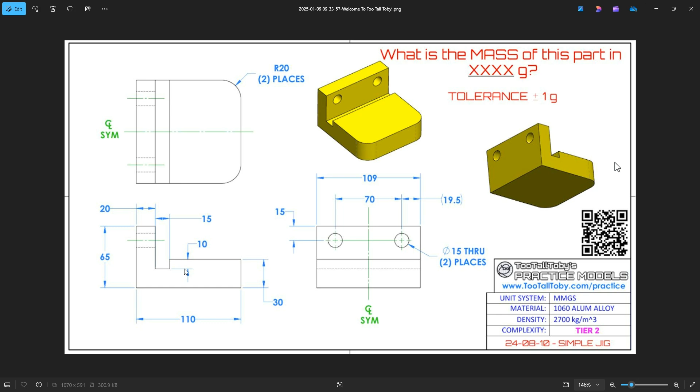everything. So basically the key things are we got 110 length, 109 width, 30 height on the base, and then we have our height here for the 65 from the bottom location, and then we have a little cutout here that's got a 15 millimeter size here, and a 10 depth from the top. So let's go ahead and do this model. Very simple. In IronCAD we'll build it really quickly, so this won't be a very long video.

So let's start off with an extrude here, and again we know we're in millimeters, so we're gonna go ahead and type in these values as we mentioned. The width of this is 109, and we're gonna set the length to 110, and we'll set that height value to 30. That will give us our starting points.

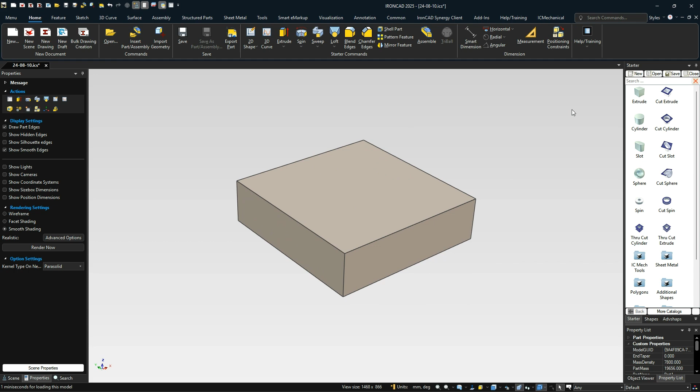Next, we can do a couple different ways of approaching this. We can drag and drop another block on here. We can pull this top face up and extrude and adjust it. Either way works, so I'll just start with another extrude feature, and I'm just going to drop on this point back here, and I'll simply align this back one by holding my shift key down and pulling that, and then right-clicking on our side handles here to do a symmetrical size, and shift to snap to that.

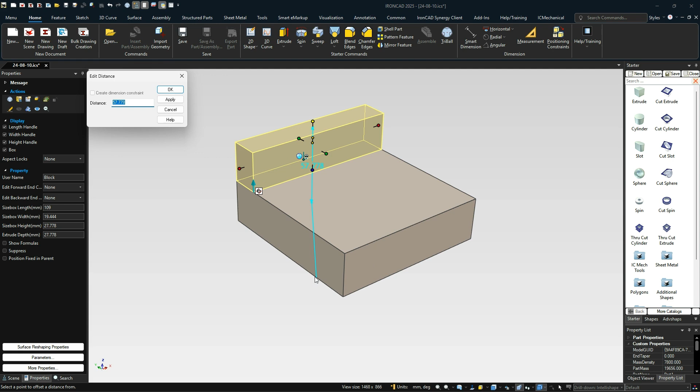Next, we can do the sizing, which is we know the distance from the bottom, so we can just right-click on the top handle at a distance from point. We pick our bottom edge, and that value, as I mentioned, was 65. And we know the thickness of this is 20 millimeters as well. So that will give us our overall shape for that.

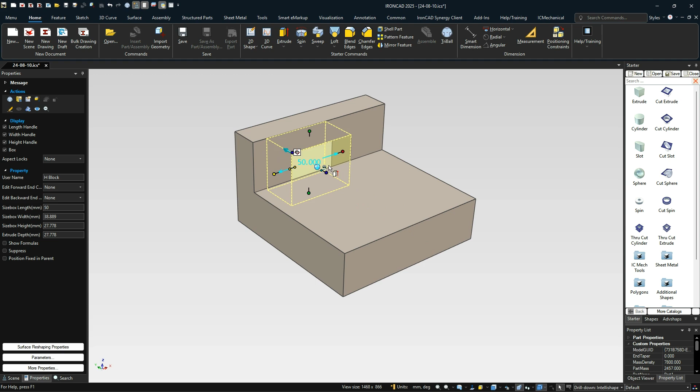Next, we'll do the cutout, and we'll do basically the same operations here. Notice when you drop onto the shape, it can give you a different orientation when you drop on an edge. So notice this one's extruding in this direction, and this is based on our view direction. So it currently sees that this is the main viewing direction. I'm going to delete that, and rotate down just a little bit. Now if I drop on that edge, notice it'll extrude in a different direction.

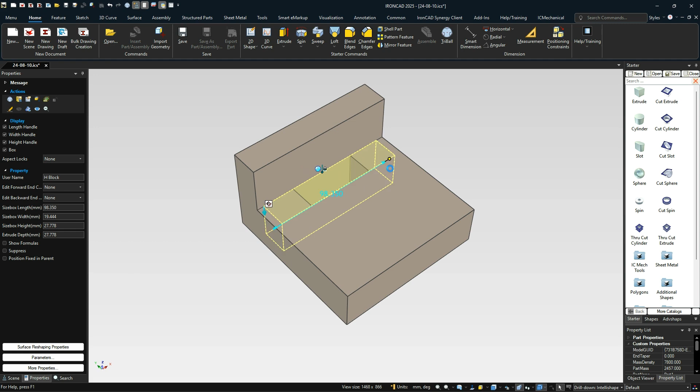So that's a nice little handy tip there if you're ever using IronCAD. That's how it drops when you drop on an edge. On a face it always does normal, but on an edge it has to determine which way to go. So in this case we dropped on an edge. I aligned the back handle to our face, and I'll do the same thing, our symmetrical here. Doesn't really matter, we can pull it all the way through.

But we can pull that there, and then we can set our depth on this guy, which we said was 10. And our thickness on this, since we're already aligned to the inside face, is 15 in that direction. So that gives us our cutout there. And the last thing we need to do is just add blends to this. So I'm just going to select down to our edge level. So we go Part, Feature, Edge. And then we can select both edges holding the Shift key down, right-click, Blend Edges.

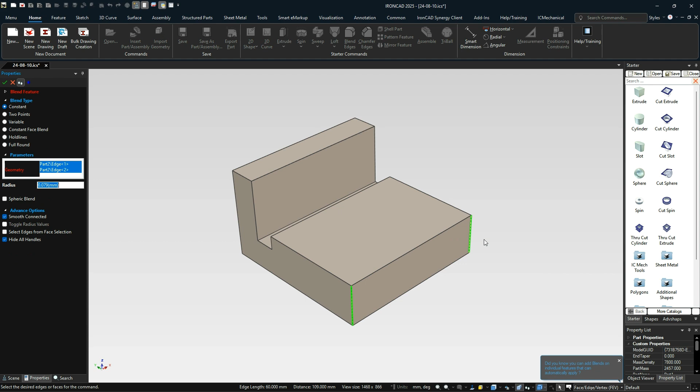In our case, this is set to 20, so let's type in 20 and hit Enter. That'll give you the preview. Hit Enter again, it'll apply the command. So that will give us the overall shape of our model. And the last thing we had to do is our holes. So one thing I'll do is drag and drop a hole right onto the center point of this face.

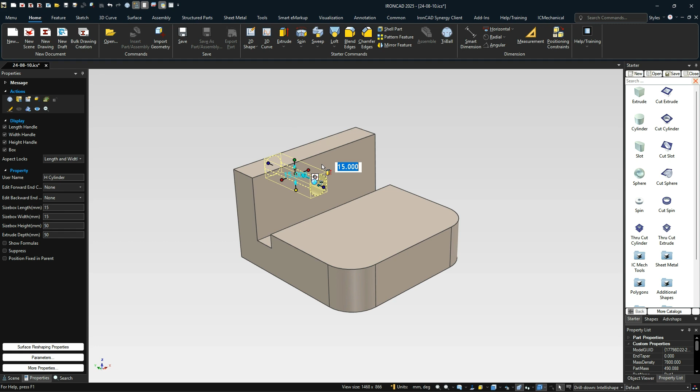And we know the diameter of this hole. If we select on that, let me look for that. We are at 15 millimeters for those. And we do know that the distance from the top here is 15. So I'm just going to turn on our triball, and I'm going to right click and say edit distance from point. And we're going to set that to 15. And that puts us in the right location.

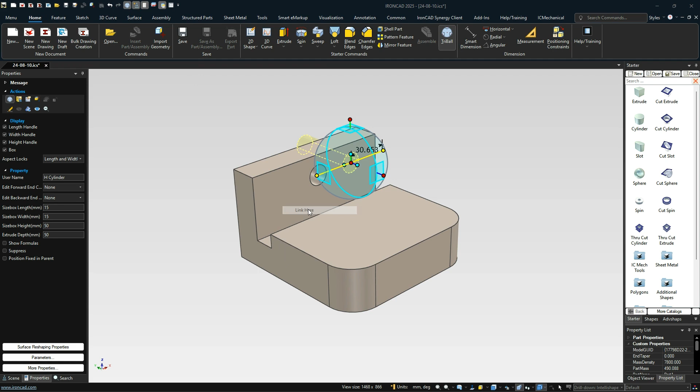So since we're in the center of this part, and we need to have two of these, and it gives the dimension 70 millimeters apart, this is a nice little handy trick on the triball as well. We're going to right click and drag this to one side, and we're going to say link here, or link or copy, either one will do the same, except one's a linked relationship. But we're going to do link here, and we're going to have one shape.

And why I'm saying one, not two here, because we're going to actually just type in half the distance of 70, which is 35. And tell it to repeat in the opposite direction. So we're going to repeat that in the opposite direction, hit OK. That will put the hole on the other side. We can hit escape to turn off the triball, and we delete that original shape.

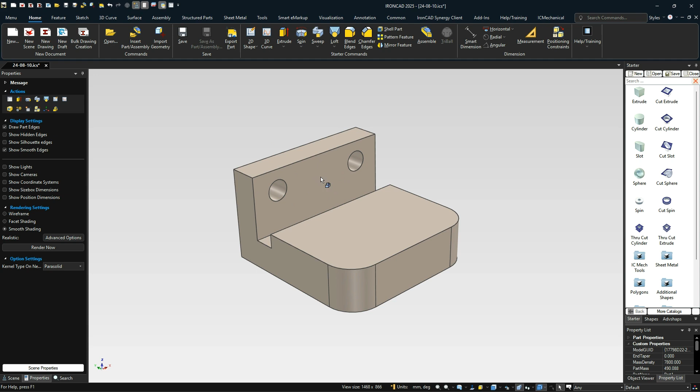So that's a unique thing here as well. This is not like a pattern feature. This is not related to that shape, so we can delete any one of those, even the parent, and the other ones still remain. So it's a really nice handy feature in IronCAD. So now we have our two holes, and if we select down to the face level on both of those holes, you can see that the distance down here at the bottom is 70 millimeters. So that was a nice little trick that we can do with the triball.

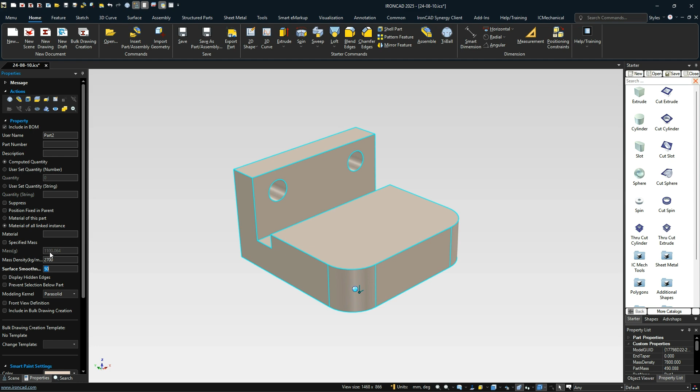Now we can go in here and type in our mass density, which is 2700, and we'll just tab out of that field, and that should give you a mass of about 1100 for that part. So a very simple part to build in IronCAD. Again, everything's done in IronCAD, in this case with all drag and drop features. We didn't have to use any sketches to do any of this. We just simply built this with multiple features here.

Of course, we could use a sketch to build that kind of L shape if you want in a sketch mode, and then extrude it one direction and add the blends. That's another way to approach it, but I just wanted to show you a way to do this with just standard features and drag and drop.